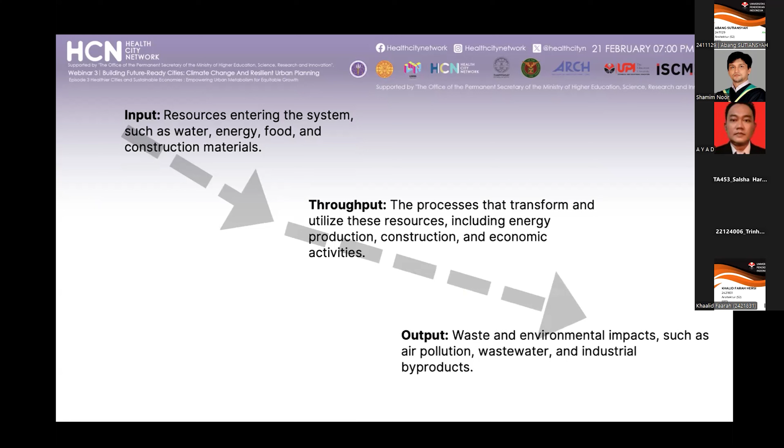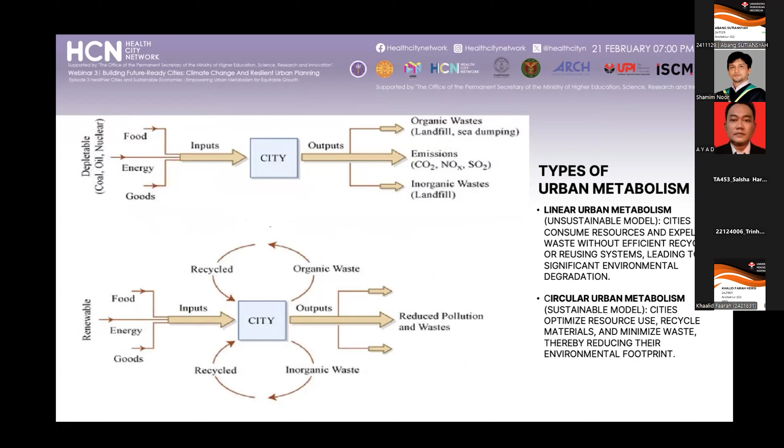There's a linear way of how you input into the cities and create outputs, but what we're trying to use is not just linear — it's more like a circular system, where everything is involved in how we use it.

That's the short intro for urban metabolisms, and now a little about inclusive design and how it's part of this. Inclusive design is a comprehensive design approach that emphasizes creating environments, products, and services that are accessible and usable by all individuals, regardless of their abilities, backgrounds, or demographic characteristics. It seeks to remove barriers that might prevent anyone from using any facility in the city.

You can call inclusive design a barrier-free design as well. Many cities around the world use this concept toward more inclusive societies as a goal. As aging societies approach, inclusive design and inclusive cities are part of the initiative that helps us move forward.

The core principles of inclusive society and inclusive design are diversity and inclusion — ensuring the design accommodates a wide range of users, to be honest, all users. Flexibility allows modification based on individuals' needs. Equity means providing equal opportunity for access and usability.

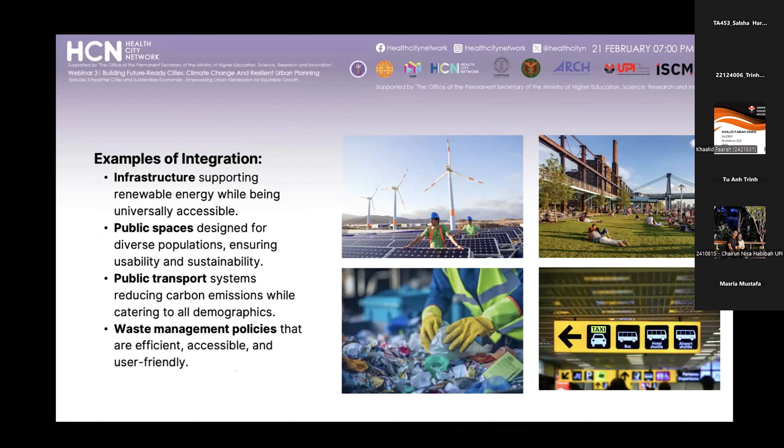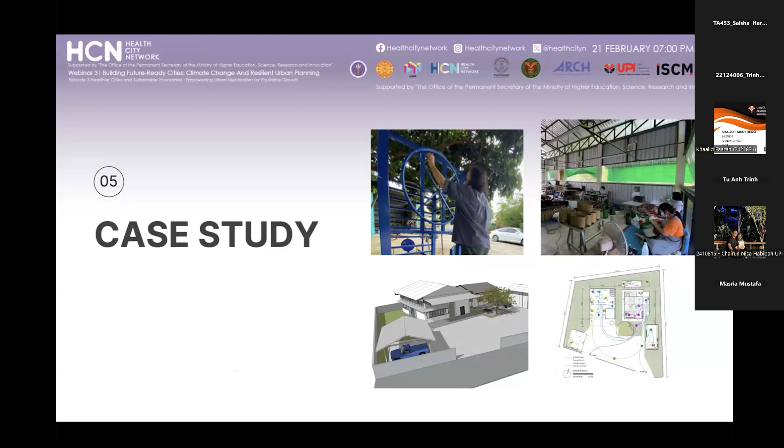So the example of integration is infrastructure, public space, public transportation, and waste management policies. So it's everything used within the cities itself. For the case studies, I have a couple of projects involving inclusive design, universal design, and public space, all involving public space along with inclusive society and universal design.

So first one is about PHCC, a primary healthcare center. It was in Lampang, another city near my city. I'm from Chiang Mai, in the north of Thailand.

So the PHCC is our basic center, but it was really crucial during COVID. It's the smallest unit of the healthcare system. It's a backbone in our city that helped us bounce back during COVID. They are the ones who give knowledge to the small community in the village.

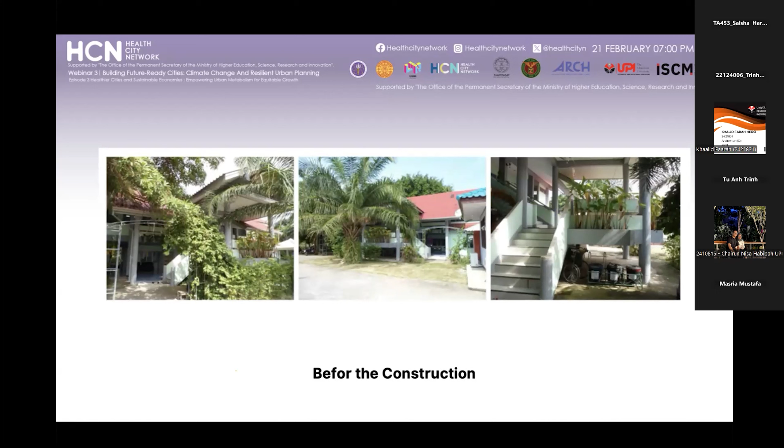So I got a request from one of the units in Lampang. They wanted me to help them redesign this facility. First, the concept is quite interesting when we looked at it, in terms of flow.

If you imagine going to the hospital, the workflow is the most important part. How you register, how you talk to the doctor, get treatment, wait in the queue to pay and get medicine, and go back home. It's not that simple, though. In the rural area, everything got mixed up.

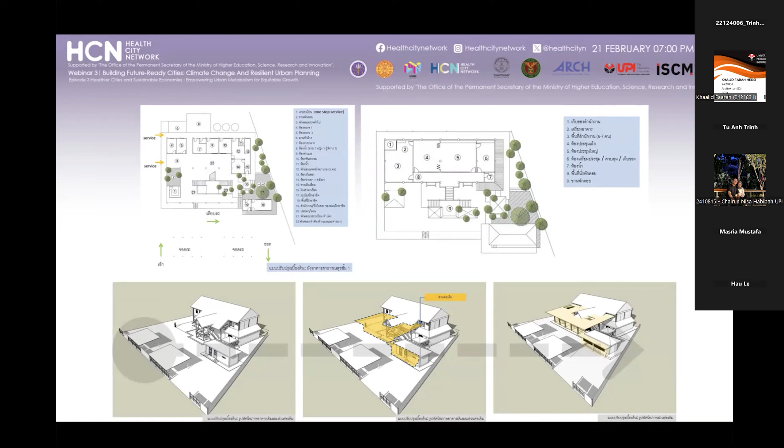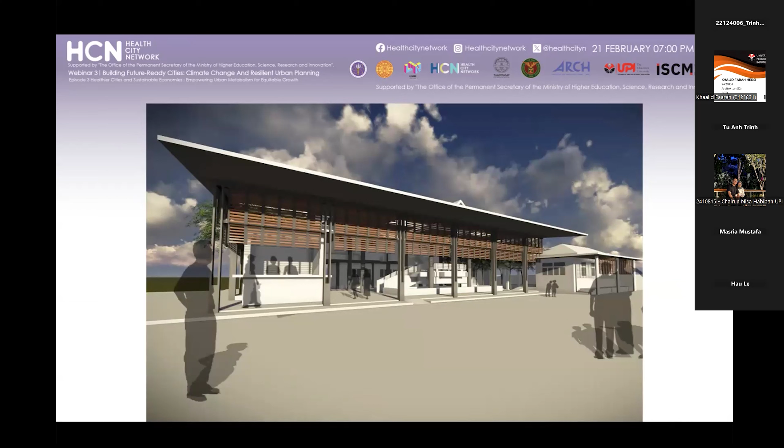So I helped them redesign the whole workflow, bringing nature, humanization, and sensory elements into the design. That's just the quick concept. Then we moved to construction, got the permit, and built this new facility.

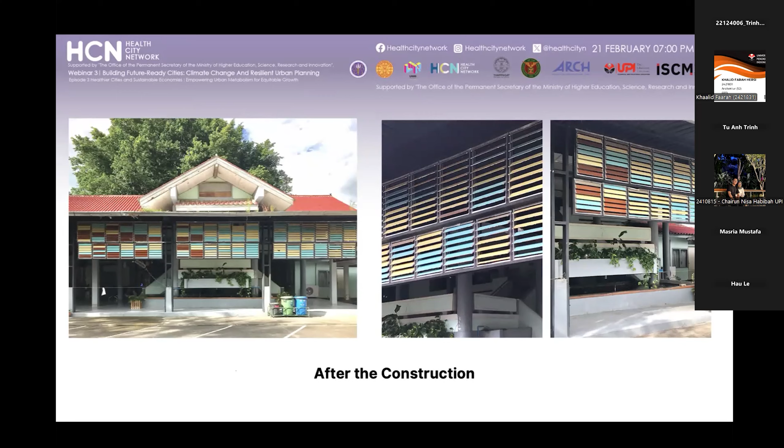We made it more humane, more familiar to them in terms of a Thai house in the rural area, where there's no underground level - it's at ground level while the working area is upstairs. So it's easy for people to use, friendly, and equipped with all the UD standard facilities.

So the second one, I have 3 minutes. The second one is another project that I did. I got a research grant from the NRCT, one of the government agencies that fund research projects.

This one is about public space for senior activities with local wisdom context. The main goal is to study the types of activity spaces and cultural activities in the northern, northeastern, southern, central regions, and Bangkok, to design a cultural activity space in 5 areas.

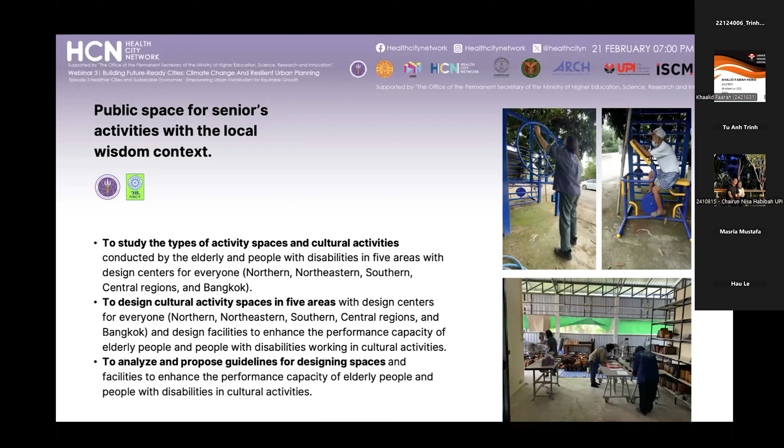And also to analyze and propose guidelines for designing spaces. This project has quite a big scope since it covers 5 areas in Thailand. So I'll give you one small example of what I did in Chiang Mai, where I conducted this myself.

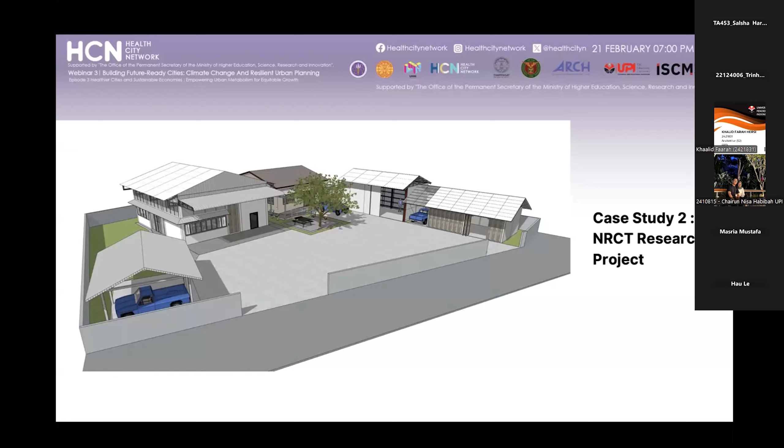So this project investigates the concept of public startups in the community. One of the aunties in a village near Chiang Mai has her own small factory, where she gets seniors in the community to earn extra income doing rattan weaving.

This is a new model, but these are the old plans. We conducted research and analyzed how the work and workflow were going. If you look at the left side - sorry, it's in Thai - you see the process for this small factory, from A to I. It's all processing, but unfortunately mixed up since she was just doing her own style.

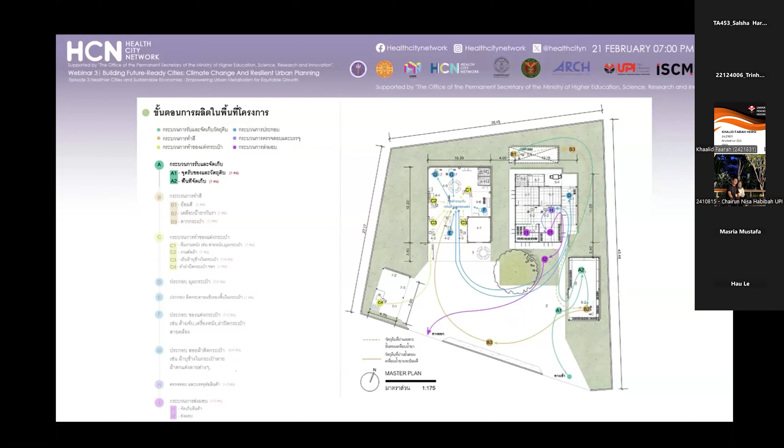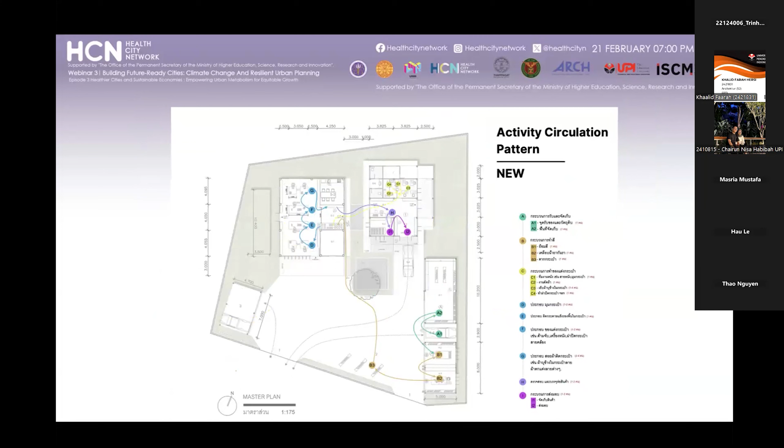After we planned, we redesigned the whole workflow, from the old version to the new version, which you can compare - it's way simpler. So we did this to help her, and this is the new perspective. We just redesigned the whole thing together. Okay, that's the second case.

So the third case is a little bit bigger, in terms of how we develop a public district. This is another project funded by the NIA as well - National Innovation Agency, focusing only on innovation.

We got the concept from one of my friends who teaches in the Faculty of Medicine. They wanted to do a medical district with innovation in mind - everyone's going for innovation these days. So we're helping them with studies.

Can we lift up this community? I'm part of the planning and architectural design team. In this project, we tried to create a big organism that helps boost activities by looking at how we plan accessibility, especially for the people who live in this area, which consists of faculties of medicine, dentistry, nursing, pharmacy, and associated medical sciences.

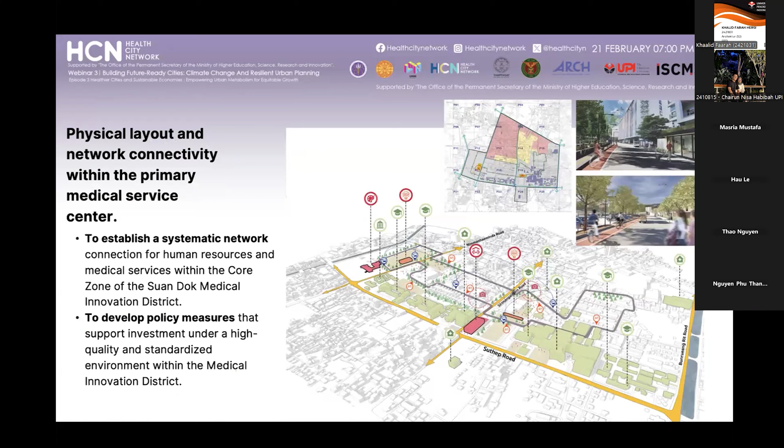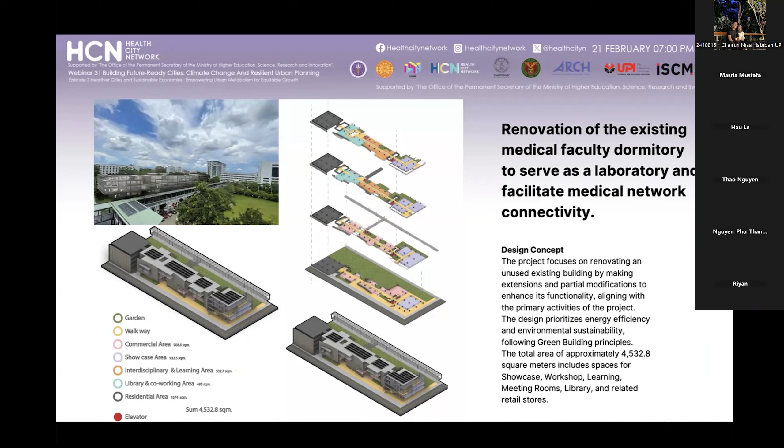That's why we thought about how the public space should work, and also tried to put the flagship research center in this area. This is one of the design notes we tried to put there, and of course we tried to accommodate the concept of inclusive design, inclusive society, and universal design within these facilities.

Okay, that's it. I've used all my 15 minutes.